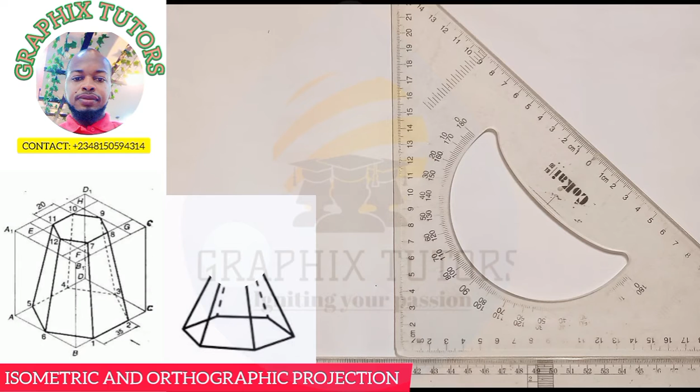If you look at the left hand side of the screen, you will see a diagram. And the diagram is a hexagonal pyramid that is truncated. Now, what I mean by hexagonal pyramid that is truncated is, this is what a hexagonal pyramid looks like. So when you truncate, it means you are removing this apex point, this pointed part, you're cutting it off, right? Now you'll be left with what you can see on the screen.

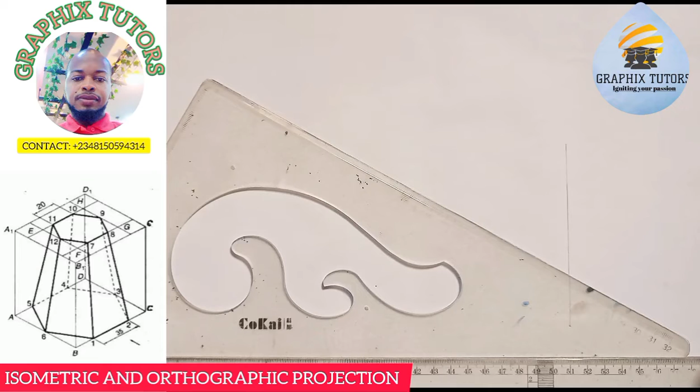So we're told to reproduce this given view in isometric projection, right? And also in orthographic projection. So since you are hearing the word isometric, the first thing you have to do is draw your isometric axis, right? So you're going to draw your y-axis, as you can see, this way. Let me take it up more. And the two inclined axes at an angle of 30 degrees. Can you see that?

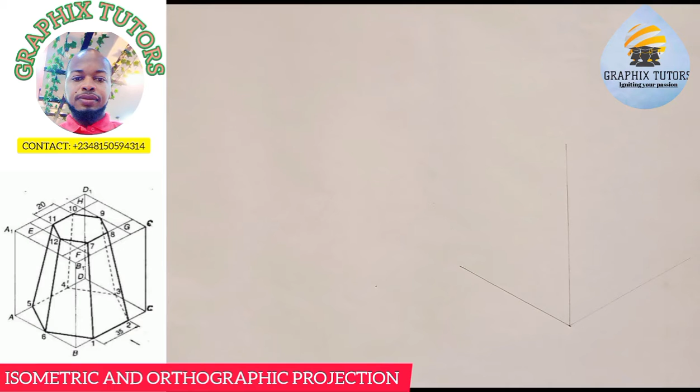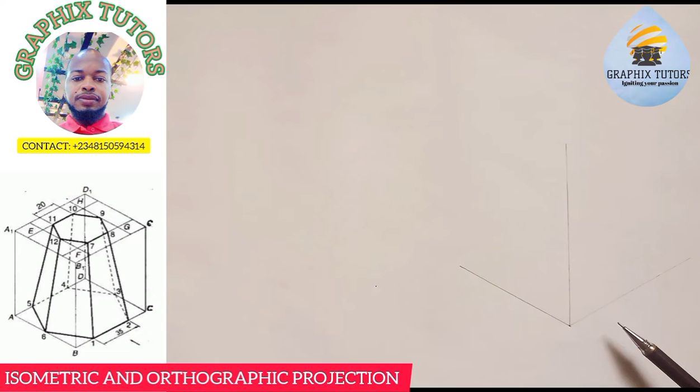So after you have done that, the next thing you'll be looking at will be the base. This is the base you can see on the screen, and this is the top. So at the base, one of the sides of the hexagon is given as 35. So it means that you take your compass, you measure 35 on your meter rule. That is one of the sides. And you come to any point on your paper and you draw a circle, faint line.

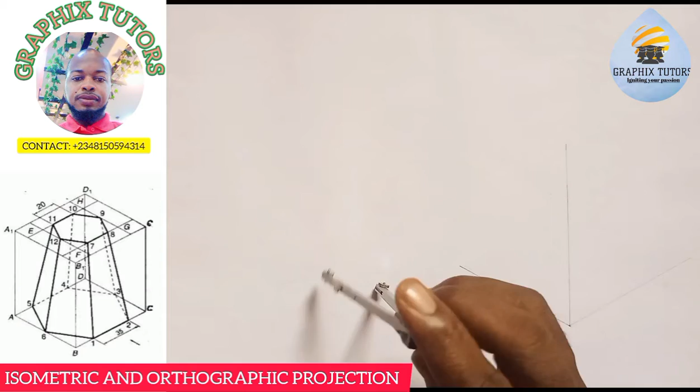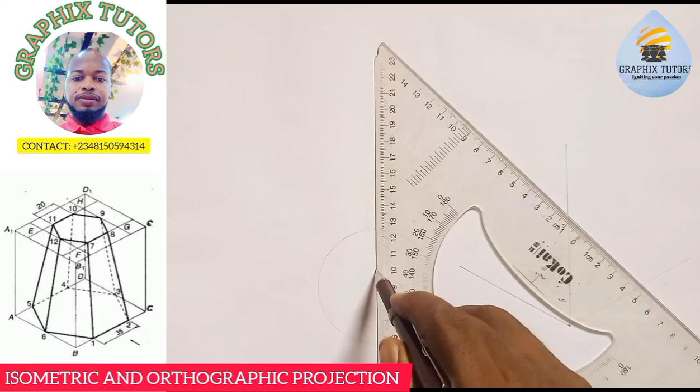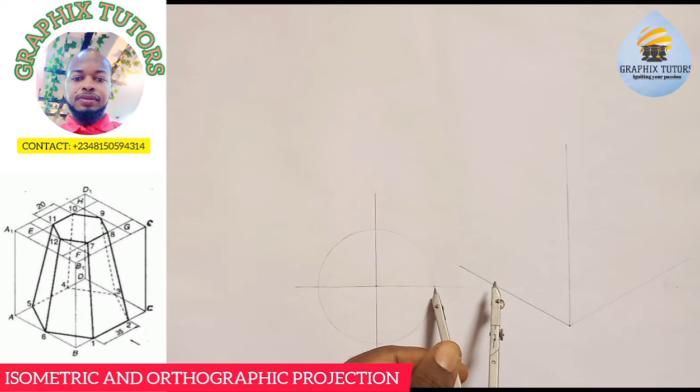Hope you can see what I'm trying to do here. So that is the circle you're drawing, right? Now you take your instrument and draw a vertical line and a horizontal line passing through the center of that circle. Can you see that? Now the hexagon we're about to draw is a hexagon across corners. How? With the radius you used to draw the circle, you place it at this end here, you strike an arc up and down. You come to this end here, you strike another arc up and down.

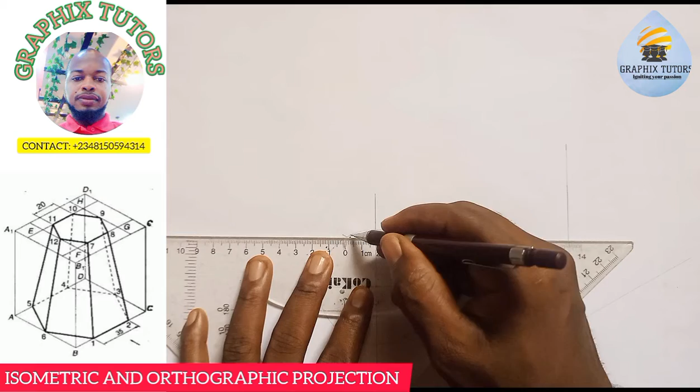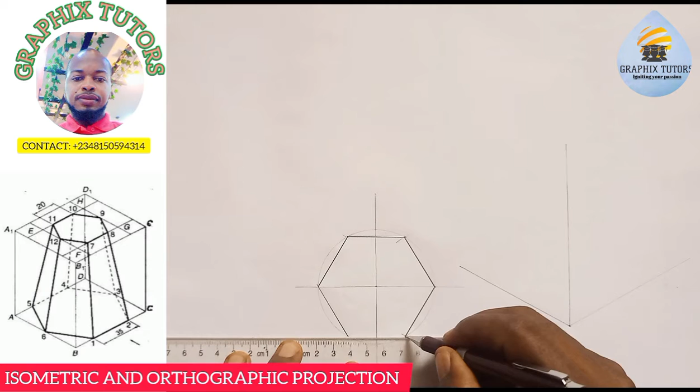Now you use your rule and you're going to draw the hexagon. So from here to this point here is one side. From here to this other point here is another side, making two. From here to this point here is another side, making three. From here to this point here is another side, making four. From here to this point here is another side, making five. And last but not least, from here to this point here is another side, making six.

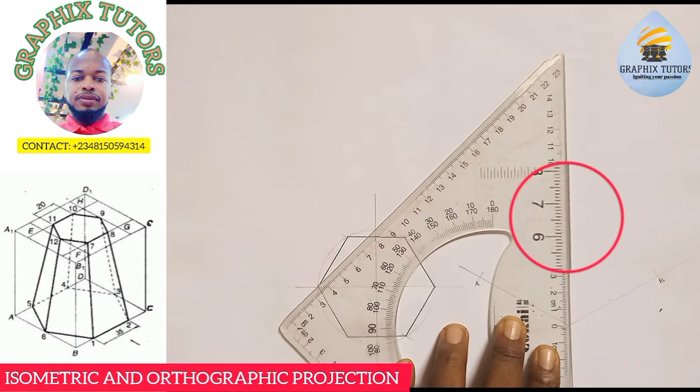Can you see that? So what you simply do now, you take the entire height, that is from this base here to this base here. We will now mark the length of my hexagon. Are you with me? So I'll term this end that I mark to be A and here to be B. So let's see how we go. Since we're not given a height, if you look at the figure closely, there's no height. So I'm going to take my height to be 90. You can take whatever height you want. So from 0 here, right, to 9 is 90.

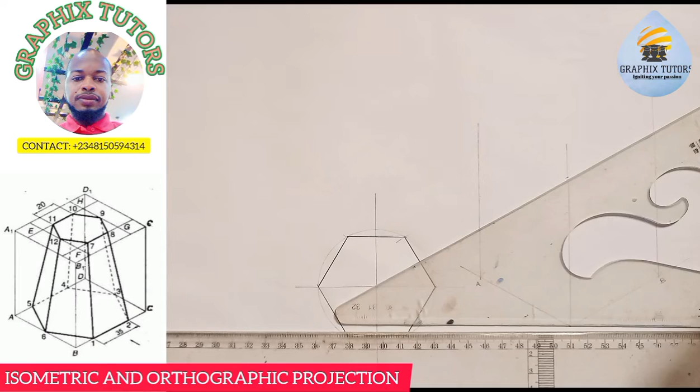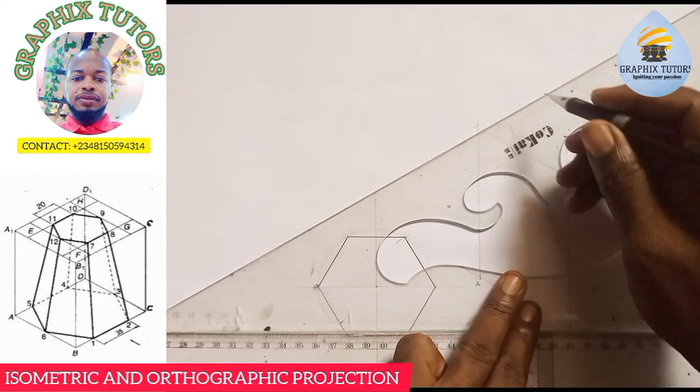So with the help of my instrument, I will now project those points upward. You take this up, and you come here also, you take this up. And what you did here, drawing an inclined line, you also do at this point that you marked 90, in this fashion, and also in this fashion. Then you close it up from this point. You draw another line this way, and from this point, you draw another line this way. So this is what we have done.

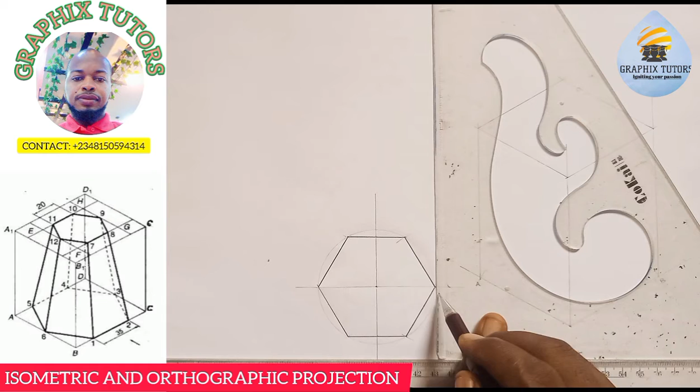Now, the next thing we're going to do is draw a faint line that will complete the box, inscribing this hexagon in a square. What do I mean? Take your instrument, and on this point here, tangential to that point, you draw a vertical line. And at this point also, you draw another vertical line. And at this baseline here, you draw another line going this way. And at this baseline here, you draw another line going this way. Just faint lines. Hope you can see that. So this is your A, and here will be your A.

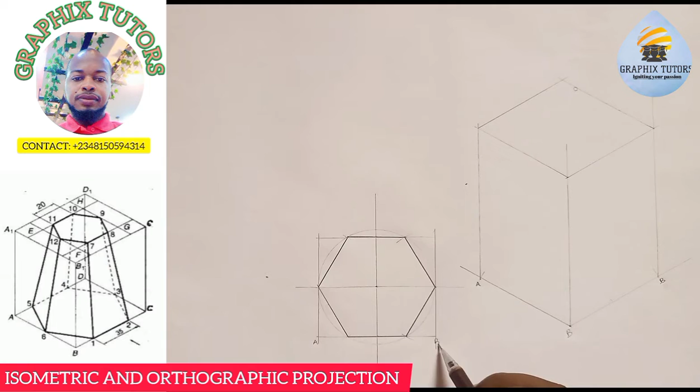This is your B, and here will be what? Your B. Then this point will be C, right? And here will be what? C, and here will be what? D. Altogether, this point will be D. Can you see that? Now I will have to complete this side here, so I'll get my point D. I've gotten A, B, C, D, right?

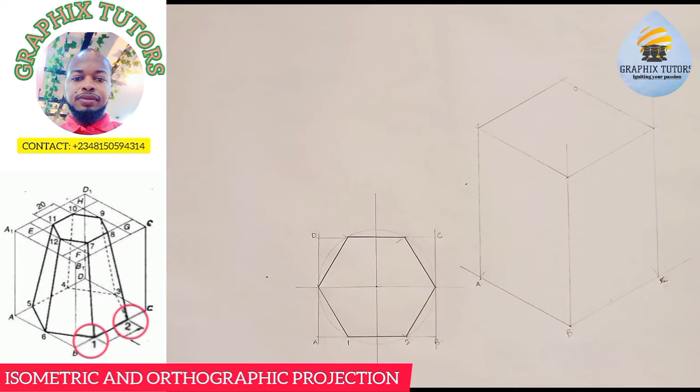Why am I placing my A and B here? Because if you look at your diagram, you see these 2 points here, which I will call point 1 and point 2. My point 1 and 2 is in between B and C, right? So I'm going to put my B and C there. So let me make here to be B, since it's facing there, and here should be what? C, right? And this part here will be what? Will be A.

So we have A, B, C, and D. So this one is B, C, and A. Why am I placing it here? Because of this side. That's why I'm placing my B and C here. So we'll proceed. So how can I get my point D? It is where a line of A meets a line of C.

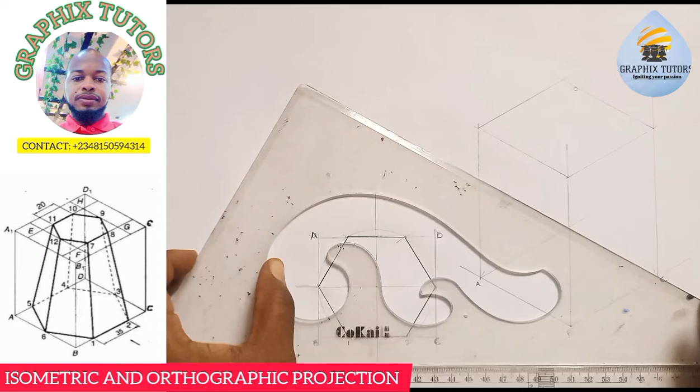So remember, if I'm drawing any line here, I'll use my instrument. So I'm going to draw my line of A and my line of C. They are meeting at this point, and that point will be what? Point D. All together. So once we have done that, see what I want to do.

Now, I name the side of the hexagon 1, 2, right? Then this side here, this midpoint is in between A and B. So I'll need to get the midpoint of A and B, and this is just it here. From here to this point is what we need. So I'll come here and I'm going to mark. And I'll also come at this point too, and I'm going to mark.

Right? Then for me to get 1 and 2, I'll move from B, I'll get point 1. Now remember that from B to 1 and from C to 2 is the same thing. So I'll also use the same measurement. From C I'll get here. So meaning that I've gotten my point 1, my point 2. Right? And this is like saying point 3.

If I do the same with the same measurement I used here, I'll come to A, I'll mark, I'll come to D, I'll also mark. So if this is point 3, here will be point 4, here will be point 5, and here will be what? Point 6. So 1, 2, 3, 4, 5, and 6. Now you do not just join those points together; you have to be very careful because of hidden features.

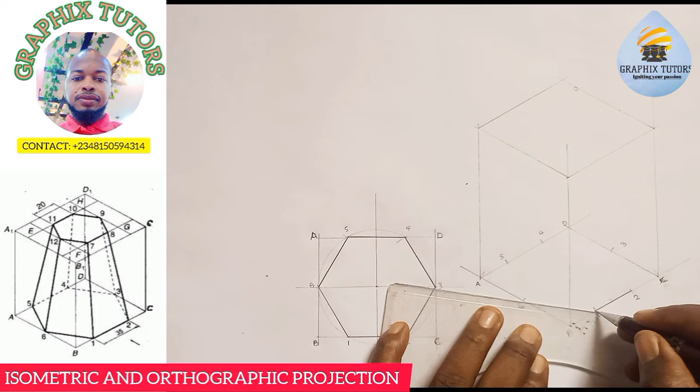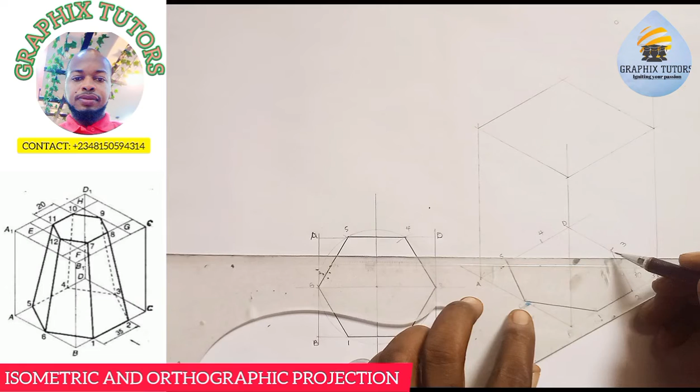So since it's very visible from the diagram, I'll connect 1 and 2. I'll move to 1 and 6. Then I'll move to 6 and 5. Can you see that? 1 and 6, 6 and 5. Here is inside the figure, so I'll wait. I'll just use my faint line here and just connect these two. So faint line there. Now we're done with that.

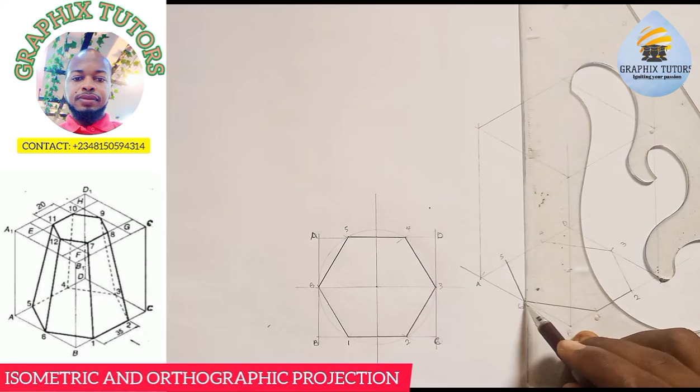So the next thing is we'll also come up here too. Now let me first of all transfer those points up this way, just to get the center. So this is 6, right? And also here, I'll mark here and here because it is a square. So I'll just come here, draw a line across that point. That is 35 and also 35. So it's meeting at this point here.

So let's move. Now we're going to the top. Look at the top here. One of the sides given is 20, right? So I am going to measure 20 and I'm going to draw my circle. So from 0 to 2 is 20. Then I'll draw a circle here from this point to get my 20. Can you see that?

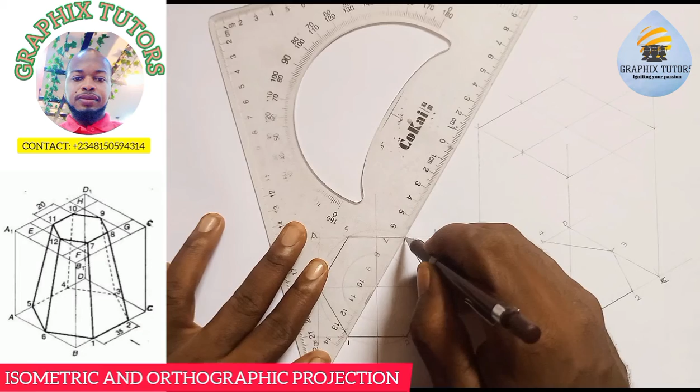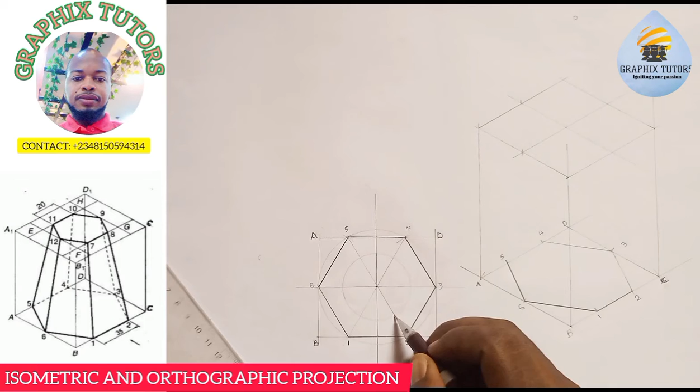And I can do something here very wonderful. I'll just draw a line passing from 4 to 1 going to the center. I'll draw another line passing from 2 to 5 going to the center. So look at where they are meeting. So this is meeting here. So I'm going to thicken it.

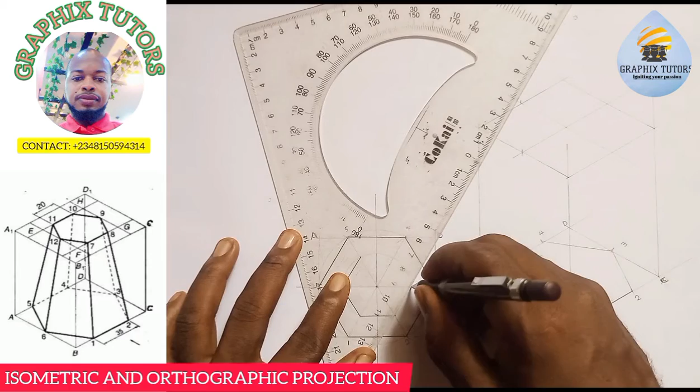And this is meeting here. I'm going to thicken it. And this is meeting here. I'll thicken it, where those lines intersect the circle. Where the line intersects the circle, the inclined line. I'm not talking about the vertical line, the inclined line. Hope you can see that. And I'll come back to you.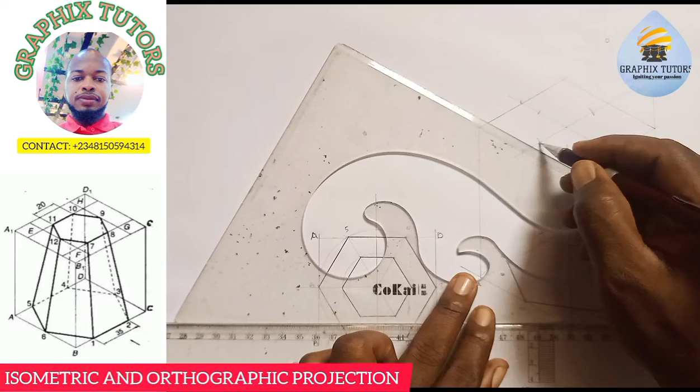So once I've done that, what I'll simply do is take the measurement from here to this end. Can you see that? And you come at the center here and you're going to mark at every line where you're going to draw out your box, just like you did at the base. So draw a line across this point. Draw another line across this point. Then you close here. And also you close here.

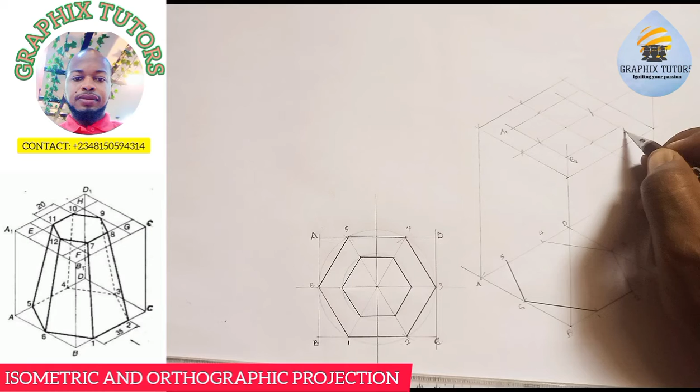Can you see that? Now what you do, I can easily say that if this is A, here will be my A1. If this is B, this end will be my B1. This is C, this end will be my C1. Then this will be D1, right? So just like what I'm explaining. So if I've done that, if here is 1, 2, 3, 4, 5, 6, I can easily, depending on how you want to do it.

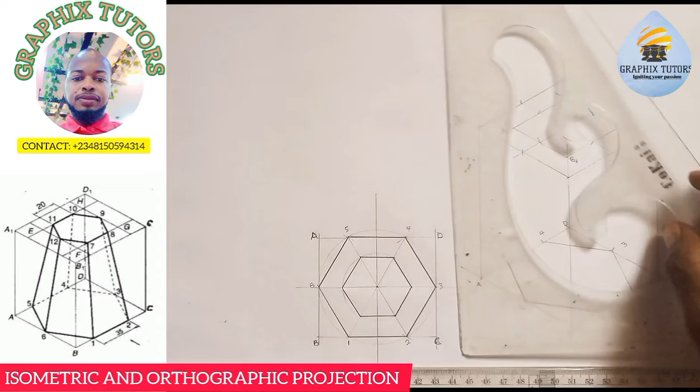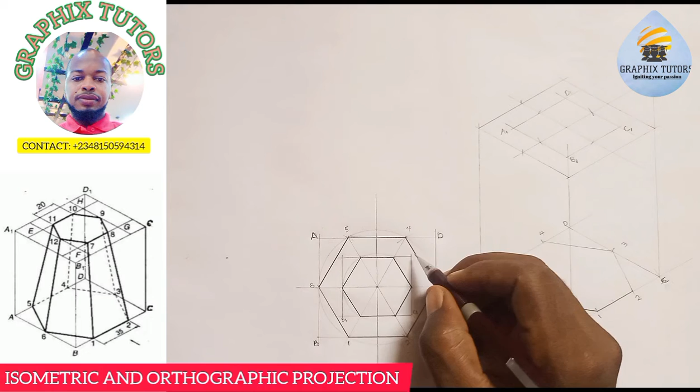So you take your compass, you also form your box from this also to make work easier for you. So just form my box, faint line, another box, faint line, and I'll close it up. So this is where they are meeting. So I can easily call it here. This is B, this will be B1 here, this small one here. This is C, this is C1 here. This is D, this is D1 here. This is A, and this is A1 here, depending on what you want to do.

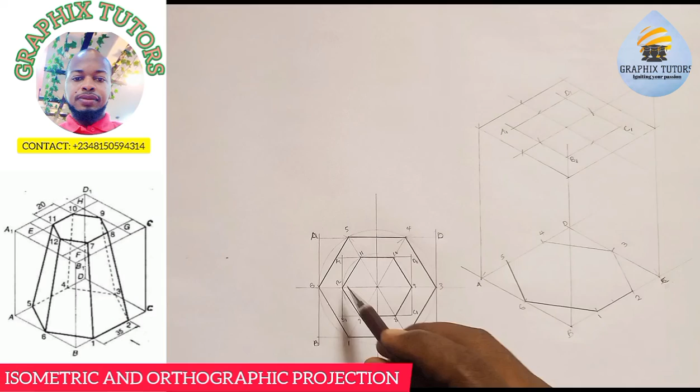Now, I've gotten 6, I'll call it to be 7, 8, 9, 10, 11, and 12. So if I want to get point 7, I've already gotten my point 12 here, this end here. This is my 7 and 8, right? So from B1 to 7, we'll come here and I'll mark to get 7. The same thing to get 8, they're equal distance from each other. So I've gotten my point 7 and point 8. Then here is 12 and here is 9.

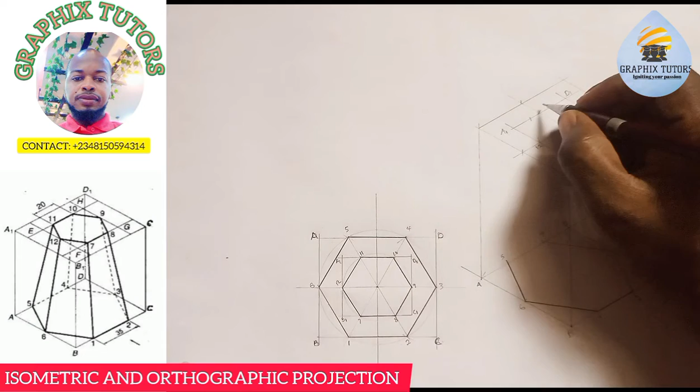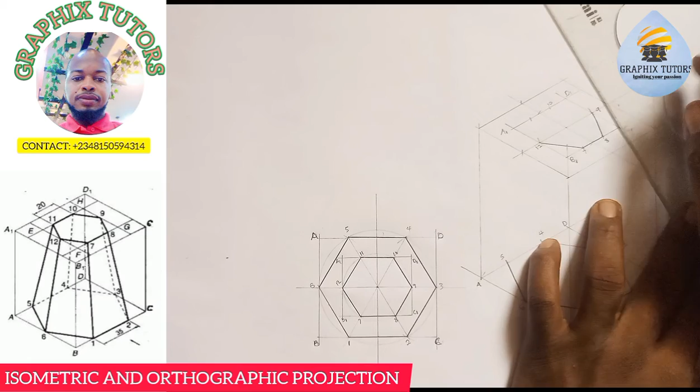Then I'll come here with the same measurement and I get 7 and 8. I'll place at A1, I'll mark to get 11. I'll place at D1, I'll also mark to get 10. So I'm going to join those points together. 7 is joined to 12. Can you see that? 7 to 12. 7 is joined to 8. 8 is joined to 9. 9 is joined to 10. 10 is joined to 11. Then 11 back to 12.

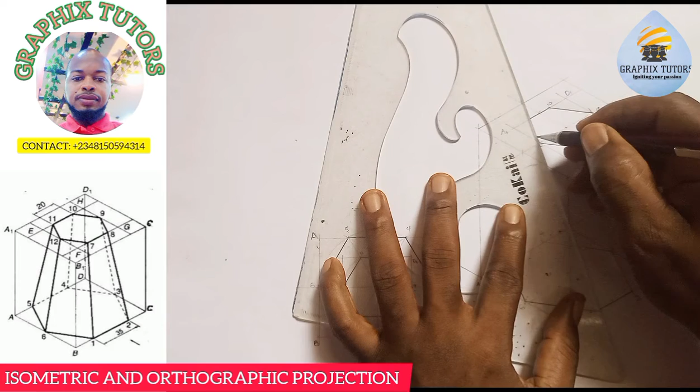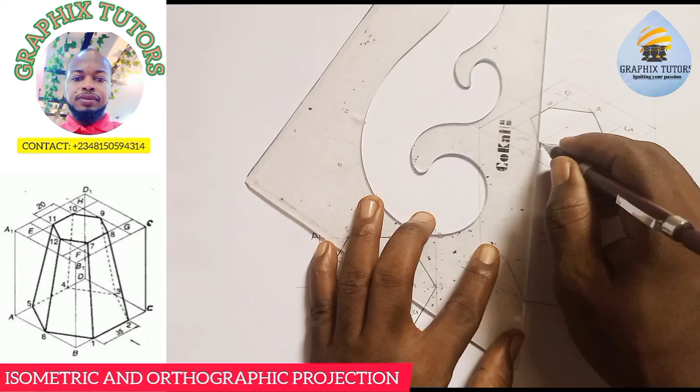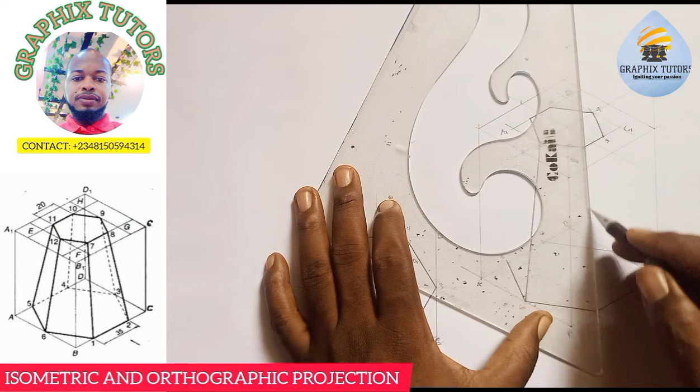Can you see that? Now what do you notice? Let's connect 12 and 6 at this point. The line you're seeing, 12 and 6. So meaning I'll connect 12 and 6 here. Can you see that? 7 and 1 here. So meaning that I'll connect 7 and 1 here. This 7, connect it to 1. Then 8 and 2. I'll come here and connect 8 and 2.

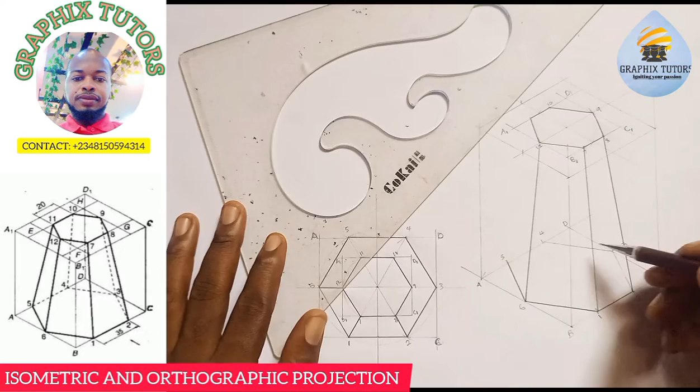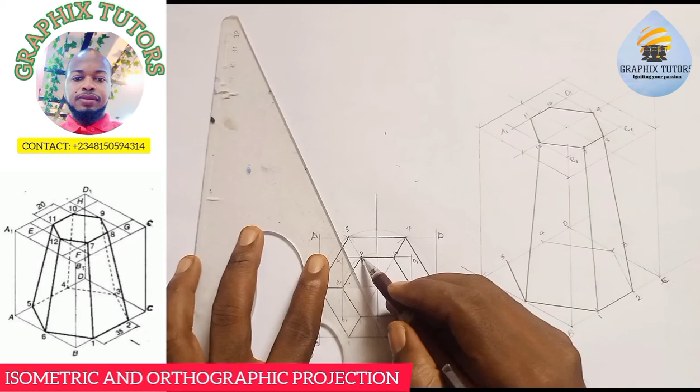Alright, I can see the other side. Now the next one, 9 and 3. I want to ignore hidden features. So 9 and 3, you can't see it because the figure is blocking it. Then the next one, 4 and 10. I cannot see 4 and 10 also, but I can see 11 and 5. So this is 11 and 5 here. So I'll connect it. 11 and 5 can be seen. It's visible.

Hope you can see that. So that is what we have here. So I've successfully drawn out the truncated hexagonal pyramid that is displayed at the left hand side of the screen. Now I will use this to complete my orthographic projection. So this is the plan.

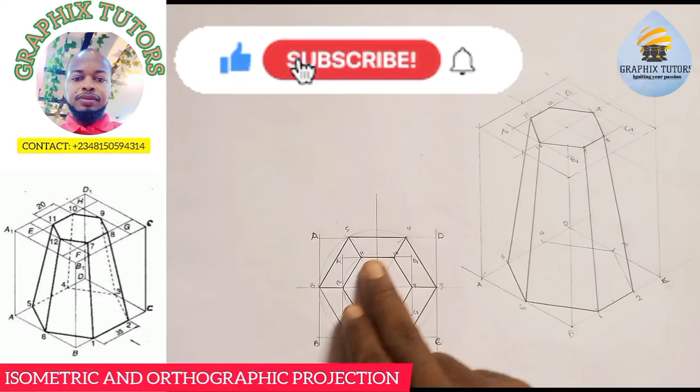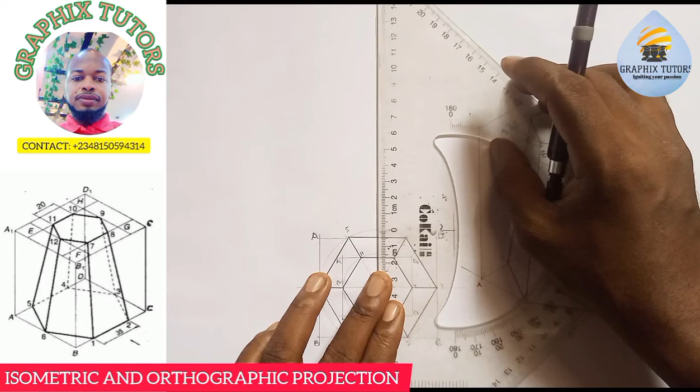So I am going to actually project this up. Just draw the center line up this way. Can you see that? Then from the base here, from where this line meets here, I'm going to measure 20 millimeters upward. So I'll take it step by step. This is 10 and this is what? 20. And I'm going to draw a line across it this way and also this way. Hope you can see that.

Now I am going to project each end. This end here, I'll take it up, and this end here, I'll take it up. Hope you can see that. So I want to look from this side here. Let's assume the arrow is pointing from this side. So if you're looking from this side, what will you see? You see these walls here. Remember that this line here is not part of our figure.

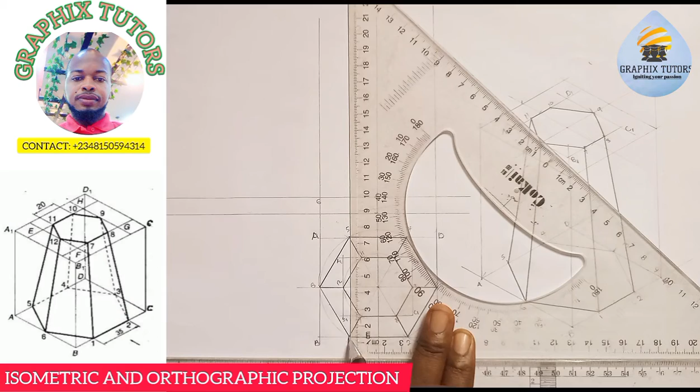So if you're looking from here, you see 6. So this is my point 6 here. You see 1. So let me take it up to where 1 is. From this point is point 1 and 5 on the same point. Then the next one, 2 and 4 on the same point. Then we have 3. So here will be 1, 5. Then this other side here, we're having 3. And here will be 2, 4.

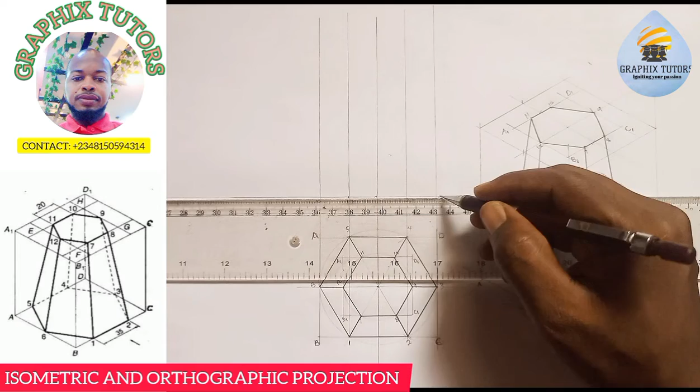So I'm going to thicken it. We've seen these curved lines as a straight line. So I'll just thicken it this way from beginning straight down to the end. Can you see that? And the height we measured earlier was what? 90, right? So I'm going to measure 90 upward. So from 0 to 9 is 90. So at that point, I also draw a line across this way.

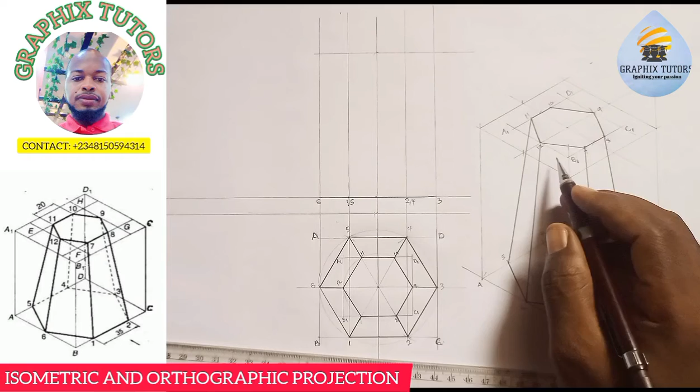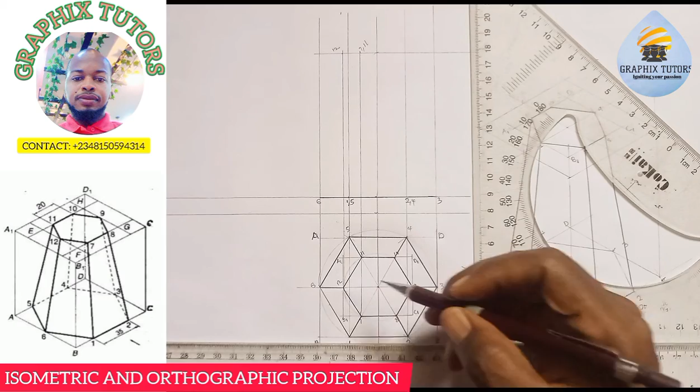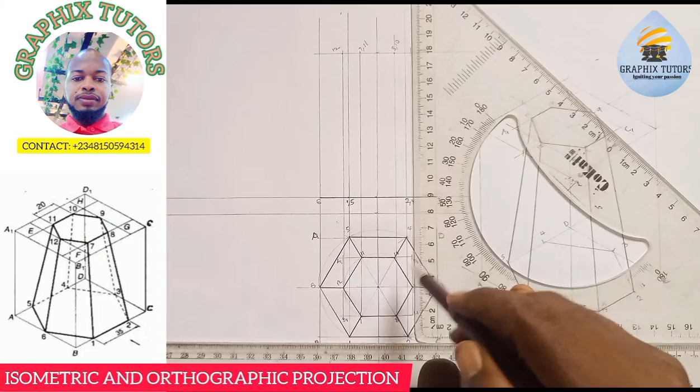So let's focus on the top. If you're looking at it from this side, what are you going to see? You'll be seeing 12, 7, and 11. So from this baseline, take it up. If I take 12 up, this point here will be 12, right? If I take 7 and 11 up, this point here will be 7, 11 because they're on the same point. Then I take 8 and 10 going up. So this point here will be 8, 10. Then last but not least, the point 9 here. This is 9.

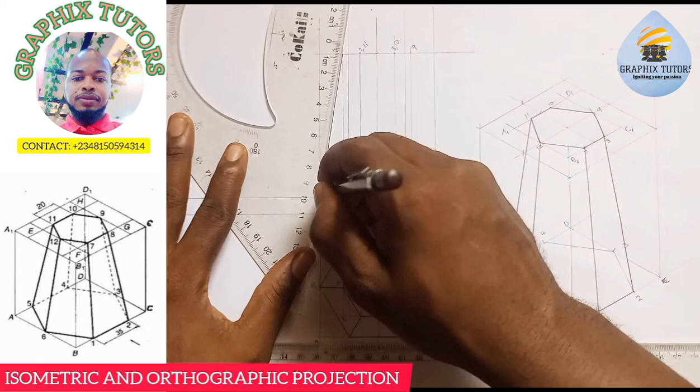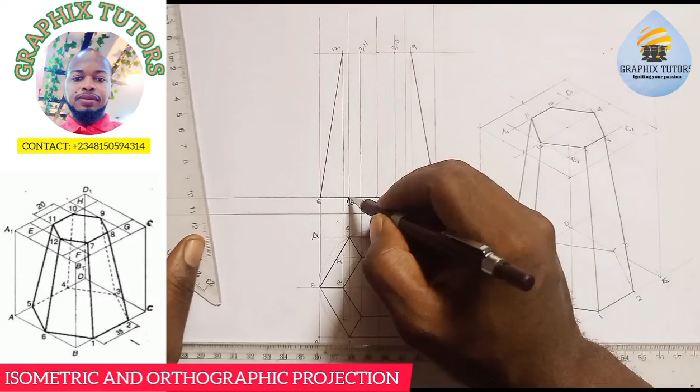Okay. So we'll do the same thing that we were doing earlier. We know that 6 is connected to 12. So I'll draw a line connecting 6 to 12. Similarly, 3 is connected to 9. I will draw 3 connected to 9. Now the next one we have 5 connected to 11. Because we have 5 and 11 and 1 on the same point, one line will just cover up those parts, because your orthographic projection is a two-dimensional view.

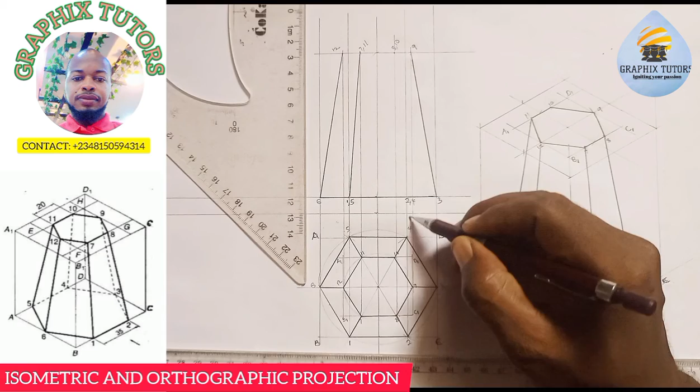Now the next one is 2 and 4. 4 and 10 connected. Also 2 and 8 connected. So this is 4 and 10, 2 and 8 are connected this way. So we are on this point. So we have this 2 and 4 here, right? So we connected to this point.

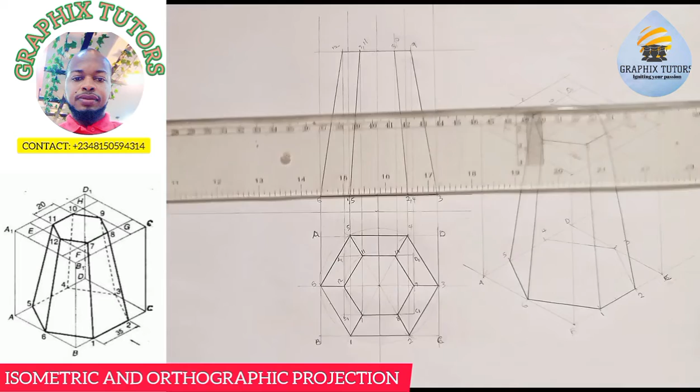Hope you can see that. Then what else do we have here? So that is what we have. And now let's close the top totally. So this is what we have there. That is the front elevation. This is the plan looking from the top. Since it's truncated, I would like to just section this part here, but that is what I'll do at the end of the video.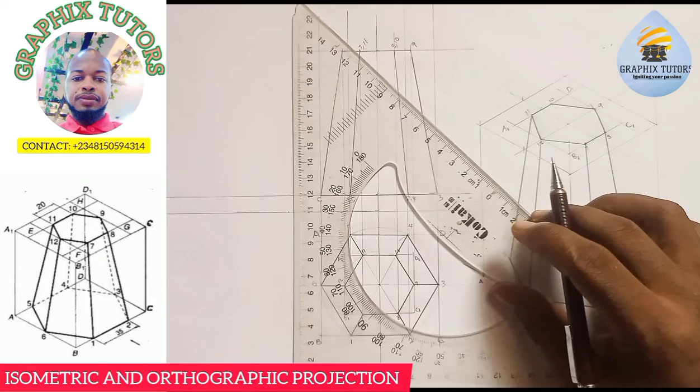So once we've done that, the next thing we'll do is from this line here, I'll measure another 20 also. So from here, from 0, that's the middle line, I'll measure 20, so that will be 10, 10. So I'll draw my vertical line across that point, and also across this point. Right? So the next thing is, I'll now draw 45 degrees from the midpoint where they meet.

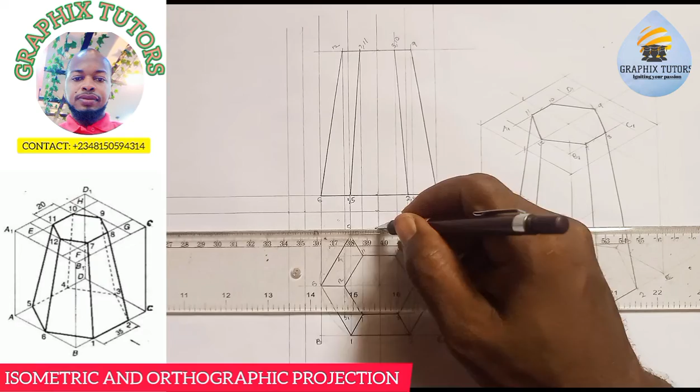This point, let me complete this. So it's what I'm talking about, this baseline here. From this midpoint here. Let me just draw this. Sorry, from here. So from here, can you see that? So I'll now take 45 degrees from this midpoint here. Let me see from this end here. So just not let it touch. Can you see that?

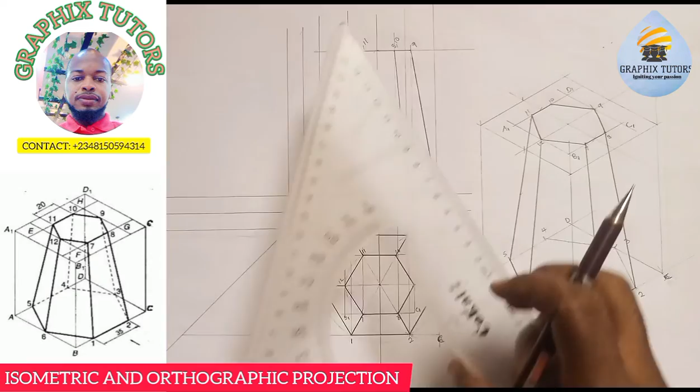And I'll also project the end here. Remember, the only thing we're seeing is what we thickened. And this one also here is touching here. So I'm going to project it up. Those points, I'll take them up. So once I take it up, I'll come here too. From here, this meets, I'll take it up. So any line that meets the inclined line, I'll project it up. So that will represent the base of the pyramid here.

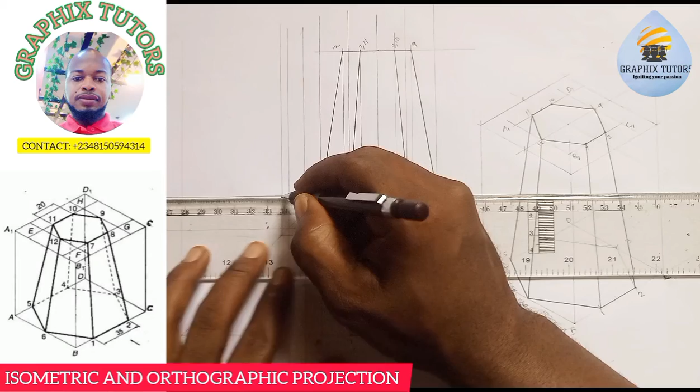So it means that if you're looking at it from this side, we're coming from here. Remember this is our figure here. We're not looking at this hidden line here. So you see 4, 3, and 2. So this is a line of 2. So this will be 2. But what do you notice? 2, 1. You'll be seeing 2 and 1 on the same point. And here you're seeing 4 and 5 on the same point. So you'll be 4, 5. They're on the same straight line.

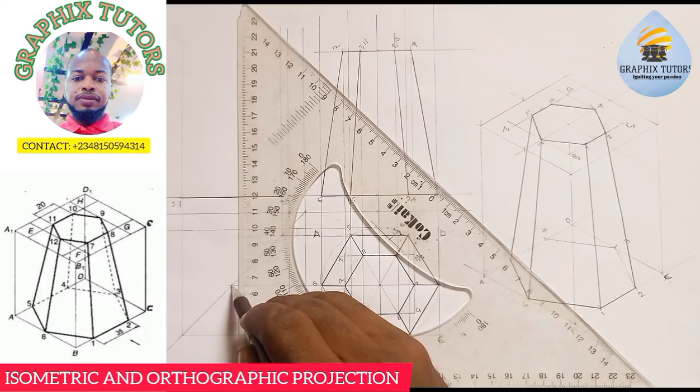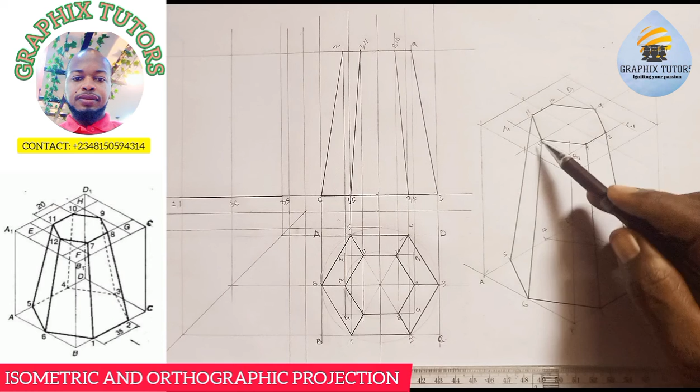The other one again, the center line that we have here. So I'll take it up. So at this point here, 3 and 6. Here will be 3, 6. Then I'm going to close the top. Can you see that? If you look at it, you're looking at this side, this angle here. So 6 and 12 on that line. So the highest point I'll be meeting will be 3 and 6. So we have 3 and 6. I've done it here. So I'm done with the base.

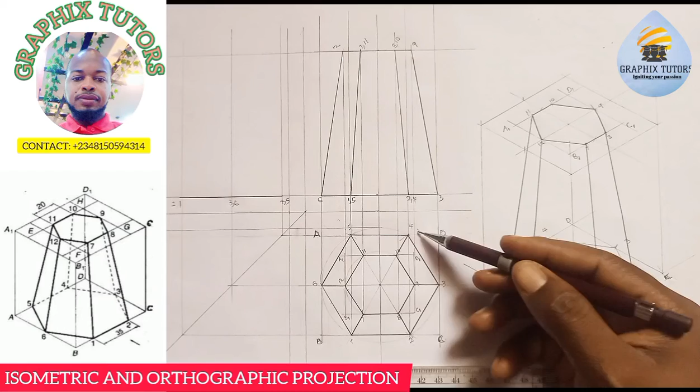So from the apex, if you're looking at it from this side, that line you see here, what do we have? 9 and 12. We're talking about the inside one now. The one we just finished is the outer one. So we have 9 and 12. So this point, the apex, is 9, 12. This top here, 9, 12. Right? And the next one is if I project this, 7, 8. Touch here. I'll take it up. So it means that this point here is 7, 8.

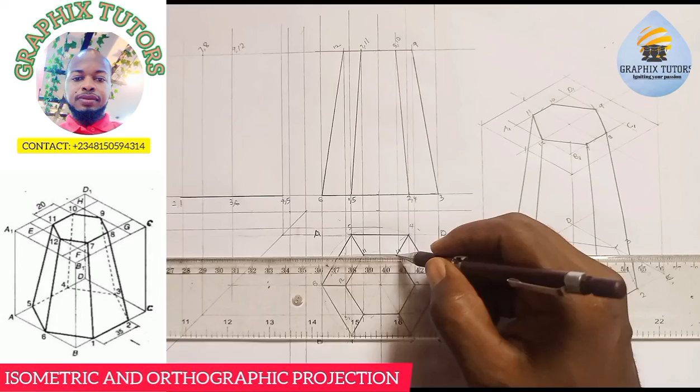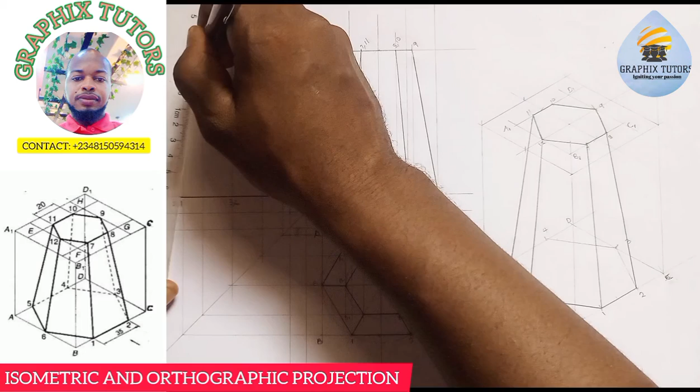Then the next one here, this other one, 10, 11, the same point. So it means that this point here is 10, 11. So we'll start joining those points together. So if I'm to join, what do you notice? 2 and 1, 2 is joining 8, and we have 8 here. 2 and 8 are coming together. So I'm going to connect 2 and 8. Right? 2 is joining 8.

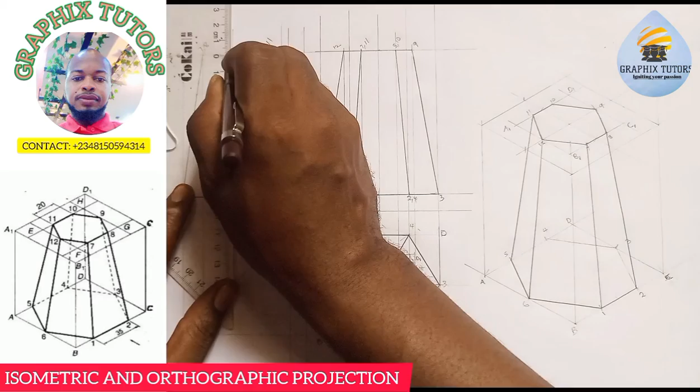Then the next one, 3 is joining 9, or 12 is joining 6, any of them. So there's a straight line moving from here to here. If you're looking at it from this side, you see the straight line. And similarly, the same thing happens here. 4 is joining 10 and 5 is joining 11. Hope you can see that.

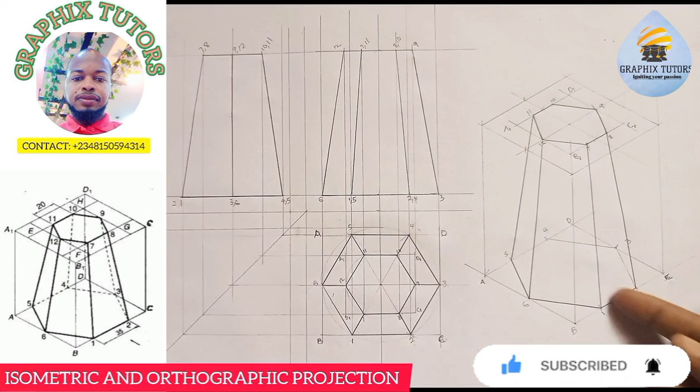And I am going to close it up. So that is our end view, looking at it from this side. This is the plan, looking at it from the top. This is the front elevation, looking at it from here, and the end view, looking at it from the side. Right?